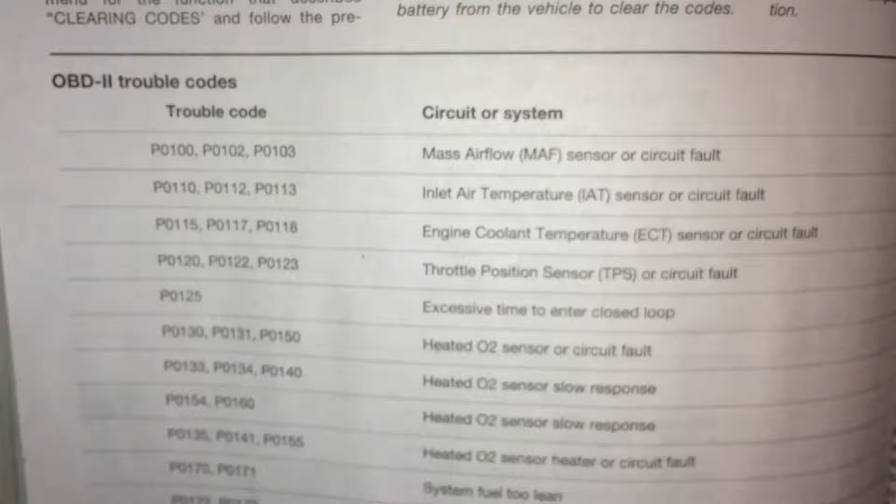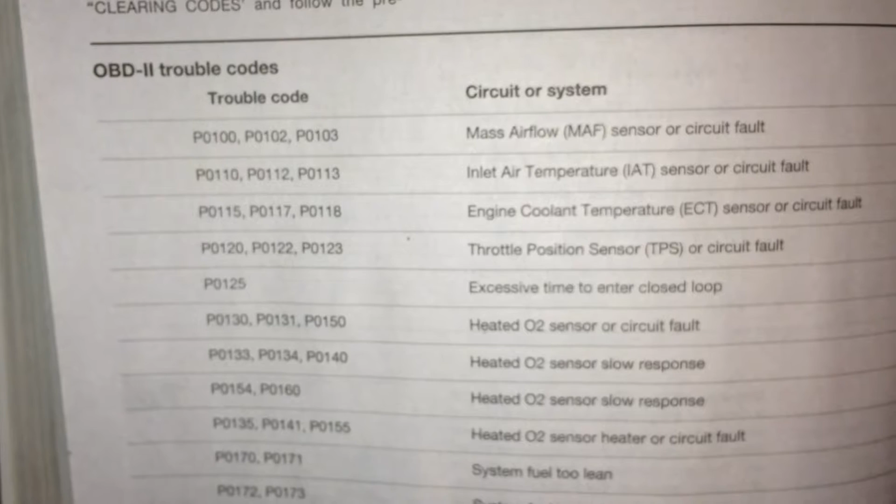Another episode of Mazda 626, Millenia, MX6, and this can possibly apply to many other vehicles. For the most part, this is actually obtained from the Mazda repair book. We're gonna go over a few of the check engine codes, and I'm gonna talk in detail about the most common ones, or at least the ones that I have seen with this particular vintage of vehicles.

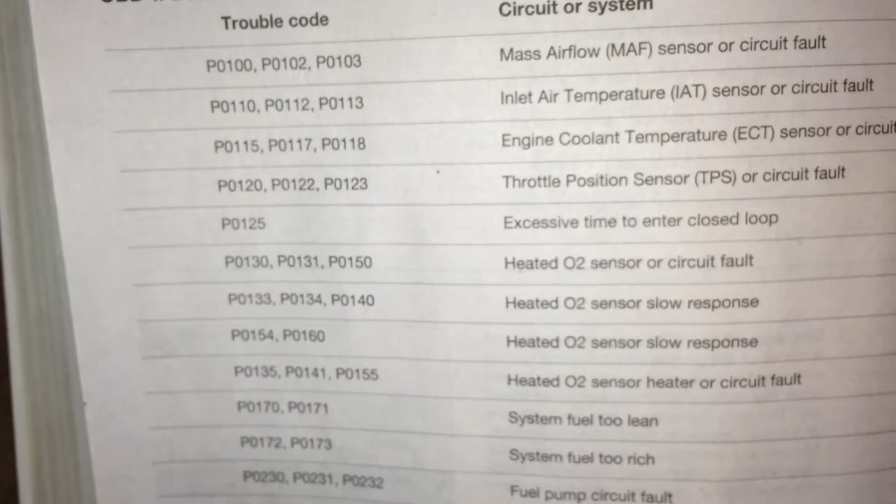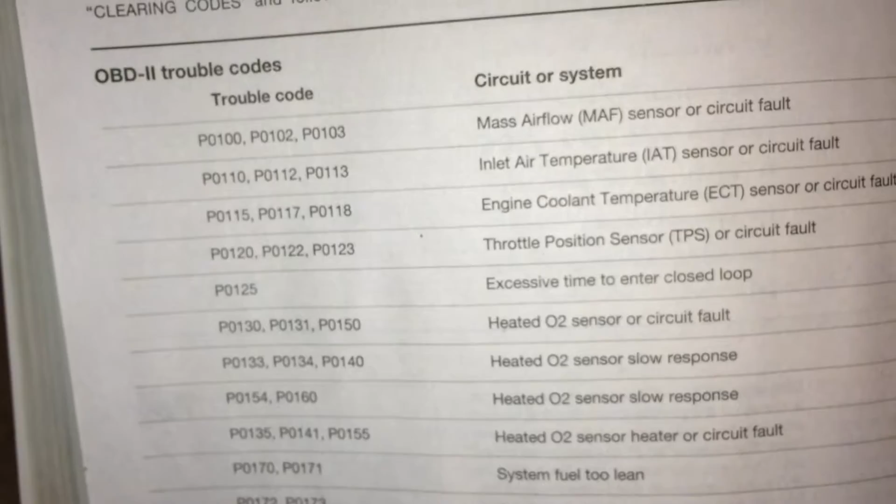Overall, I have owned, and I still do, two of these type of cars. A 2002 Mazda 626 EX, which basically means it's 6 cylinders, 2 banks, V6, and also the Mazda Millenia, which, to my knowledge, were all made with a V6 engine. Now, both of these cars' engines are identical, with a few minor changes. Can't really speak about the transmission though. They do look alike, but they behave a little different in both my cars, so I can't speak about the transmission being identical. But let's go over a few things in here.

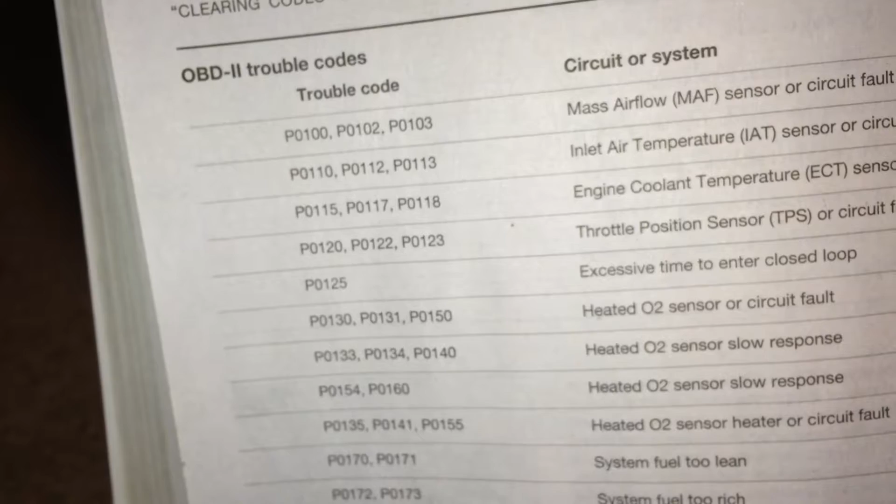And for those wondering if I'm gonna show how to test a few of these sensors, not in this video. Some of these sensors require a power probe, test light, and also a multimeter, both to the sensor and to the wiring. So we'll get to that at some other point down the road, hopefully.

But we're going to start with the first line, which is P0100, P0102, and P0103. Basically, it's pointing to the mass airflow sensor. It's very basic, to the point. It doesn't mean that the mass airflow sensor has failed. It means that you should focus your attention over there. And do not just throw a mass airflow sensor in there. Some of the sensors can bankrupt you. They are very pricey. With the mass airflow, right off the bat, I would look at the sensor.

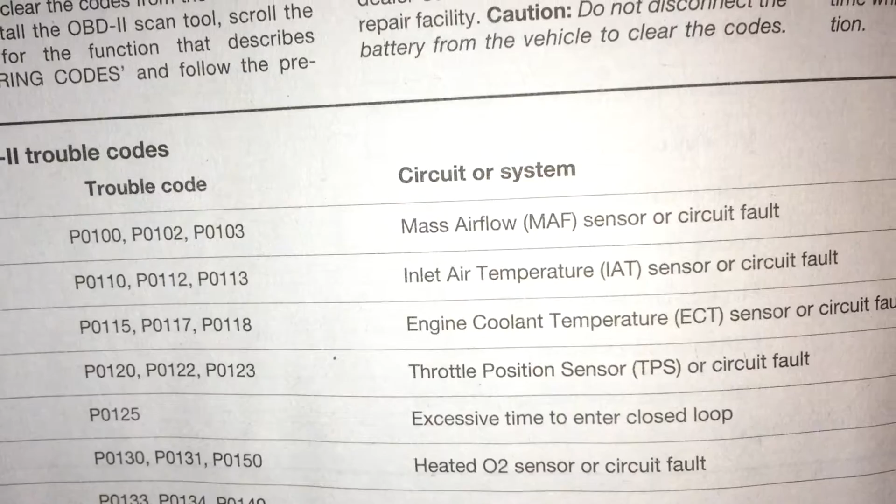Do not touch it. Do not clean it with the first thing you see. They make a specific fluid for mass airflow sensors. And I have gotten cars, not a Mazda though, where they say, well, I took it to the mechanic, he cleaned the mass airflow sensor, and when I check the code, it's pointing to the mass airflow sensor. I look at it, they cleaned it from one side and the other side is dirty. Don't ask me how this happened, but it's happened to me twice. Usually I do not like to take them out, but if I have to, I will.

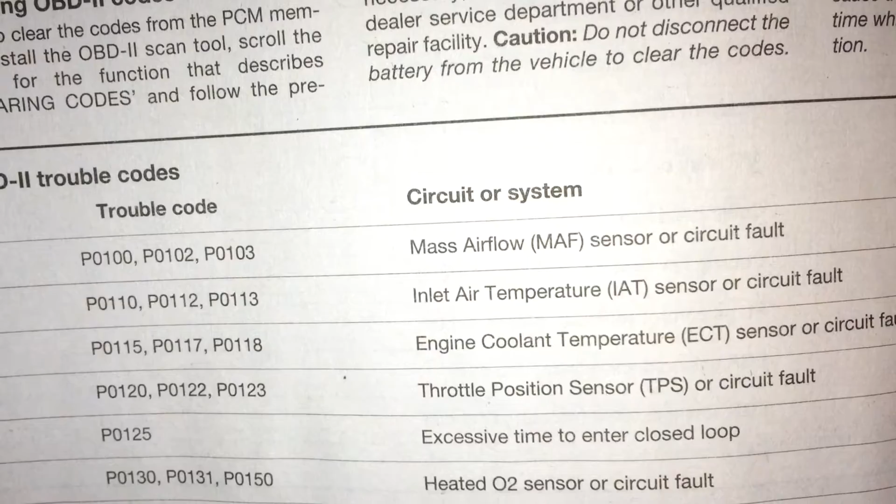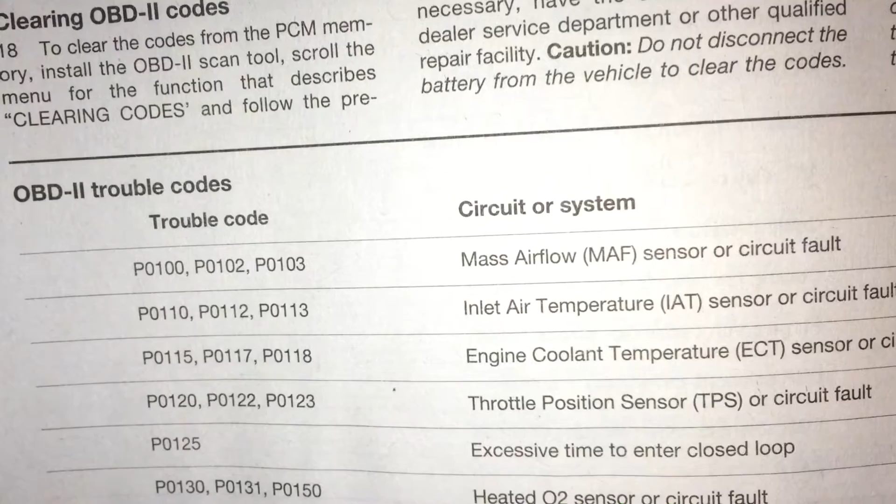Some of them actually live inside of a container or a hose or something like that. And you can take the hose off after you take it off the harness and look at it from both sides. That way I do not risk dropping it on the ground, on the small filaments, getting it dirty again. This sensor is very, very sensitive. So buy the special can for it. It's probably like $6-7. You might say you will never use it, but I'd rather pay $6-7 for a can of mass airflow cleaner than buy the sensor itself.

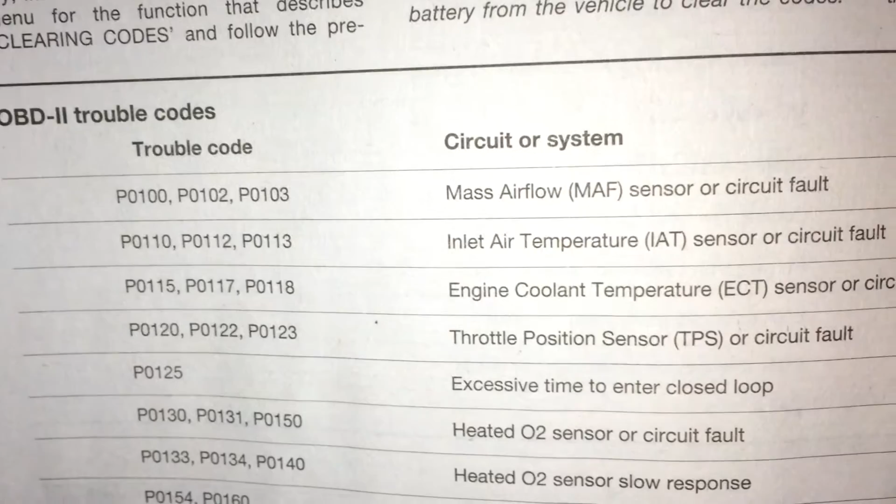Alright, so let's say that you cleaned it, you put it together, you cleared the code, and it comes back. What next? Well, I will also check the wiring, the harness. Make sure it's in good condition, nothing bent, nothing kinked. The sensor itself has a clip. Make sure it has not snapped off. It's made out of plastic. They usually break. So check on that. On the Mazda, if I'm not mistaken, the mass airflow in both my Mazdas has 5 wires. Hopefully down the road we can go over some of the wiring diagram or live footage of the wiring itself.

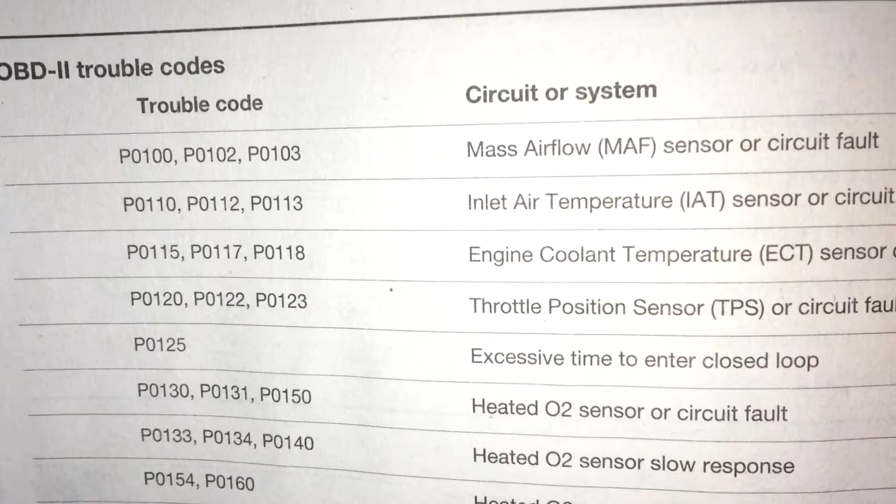And that's all there is to it. If I'm not mistaken, on the Millenia, the mass airflow sensor is with the airbox. On the 626, it's somewhere around that vicinity. I can't think of it now. I know that the airboxes are different, but usually it's around that vicinity. Usually it's way before the throttle body. So check between the throttle body and the airbox.

Alright, so inlet air temperature, IAT. I've seen this in many places. I've seen this on the intake manifold. I've seen it after the throttle body. I've seen it before the throttle body, after the mass airflow. Check them. When I can, I'll go down and check on live footage which sensor is what on the Mazdas.

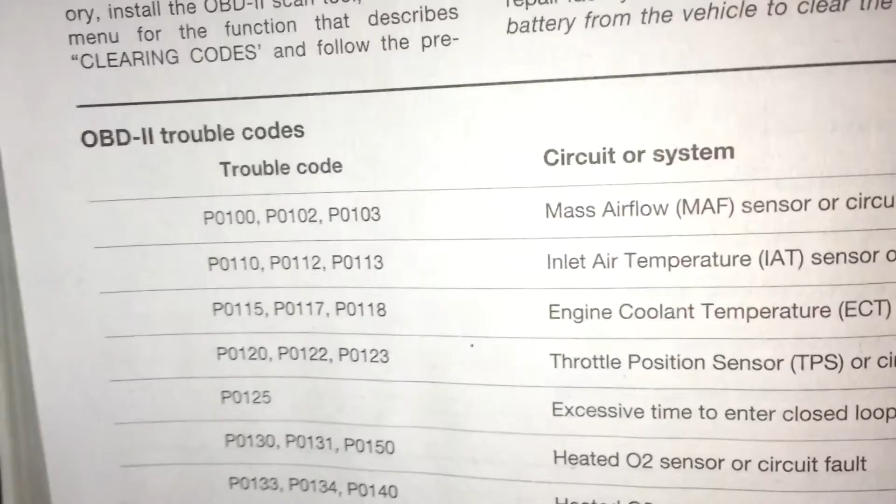So same thing again. If I'm not mistaken, the air inlet is either a 2-prong or a 3-prong. Positive and negative, and the 5-volt reference back to the computer. So first, check the wiring harness to make sure it is doing what it's supposed to be doing, feeding and bringing information back. Usually on the 3 prongs, from left to right, the left one and the outer one are positive and negative, and the middle one usually is the 5-volt reference going back to the computer with the information that the sensor itself obtained. Alright, moving on.

P0115, P0117, P0118. Engine coolant temperature sensor. Now, this is not to be mistaken with the thermostat. It may be related, but on the Mazdas, on the left-hand side of the engine, if you're looking straight at it, there is an engine coolant temperature sensor, and usually there are 2 prongs. If I'm not mistaken, that sensor creates a resistance, and given the amount of voltage, it will send feedback back to the computer. I could be wrong. It could be a 3-prong, but we'll get to that later on when we identify which sensor is what.

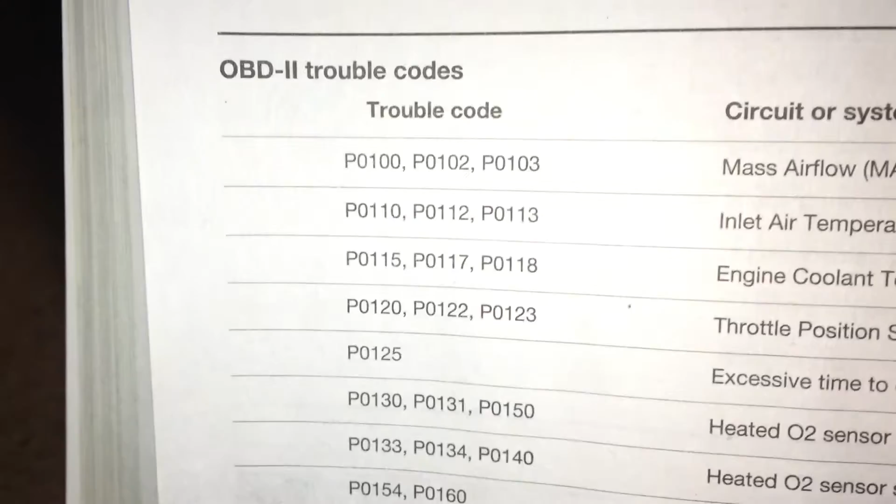Throttle position sensor, TPS. This actually is bolted to the throttle body.

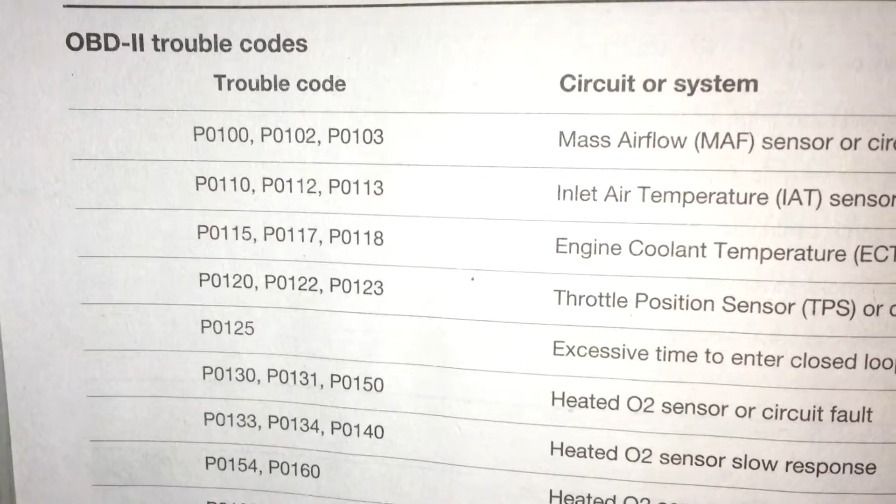And on this one, the throttle position sensor is actually bolted into the throttle body. On the Mazdas, there are fixed positions. You can't really adjust them or anything. It's just a straight 2-bolt sensor. On older cars, you could actually tilt them and adjust them that way. Not much to it.

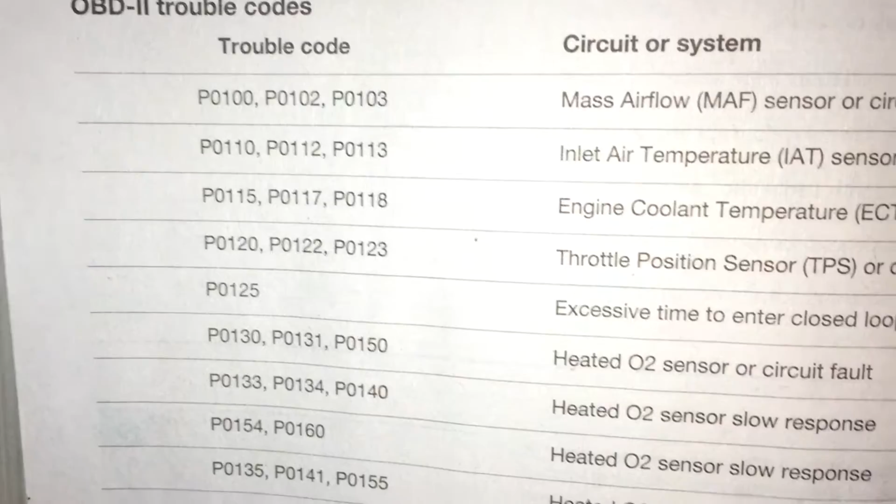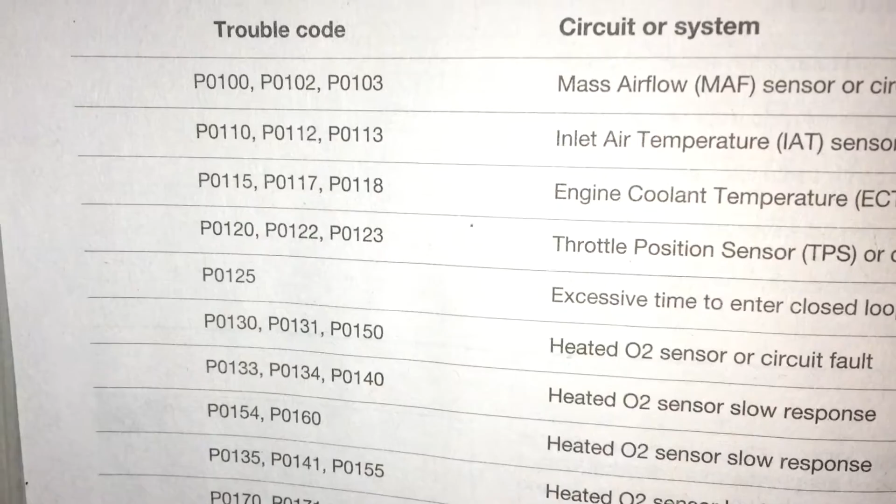Same thing. Check the wiring itself before you condemn the sensor. Sensors are not there to make your day bad. They're just telling you that something is wrong. Doesn't necessarily mean that the sensor is bad or the wiring is bad. It's probably telling you that something around that area is triggering that sensor to go off. Alright, P0125. Excessive time to enter closed loop. It sounds like an electrical problem to me. Never seen it, never dealt with it. So, moving on.

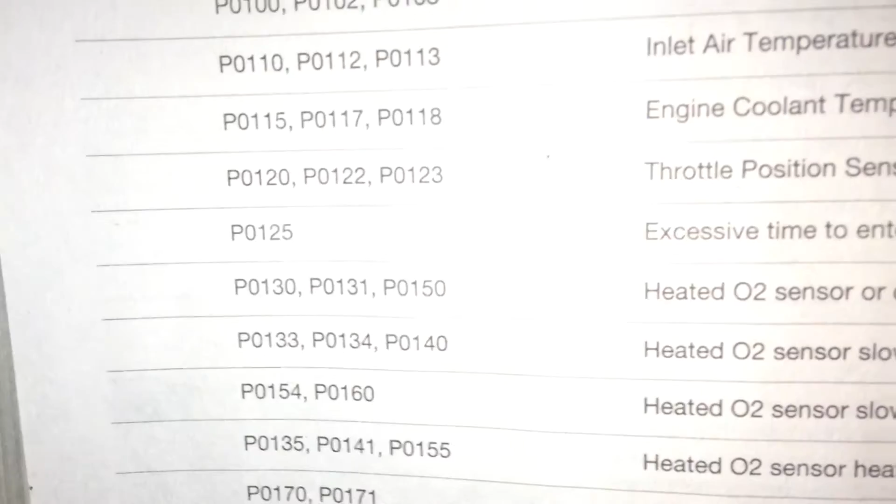So, you have a few oxygen sensor codes here. The first one, P0130, 131, and 150. The sensor or the circuit fault. Circuit fault is actually the wiring. The sensor itself can be bad. I have replaced quite a few of them. They're made out of ceramic. When you install them, make sure you do not contaminate the sensor itself. Put a little bit of anti-seize on the threads to make sure it doesn't seize in the exhaust pipe. It does get pretty hot, so it kind of welds in there a little bit. It seizes.

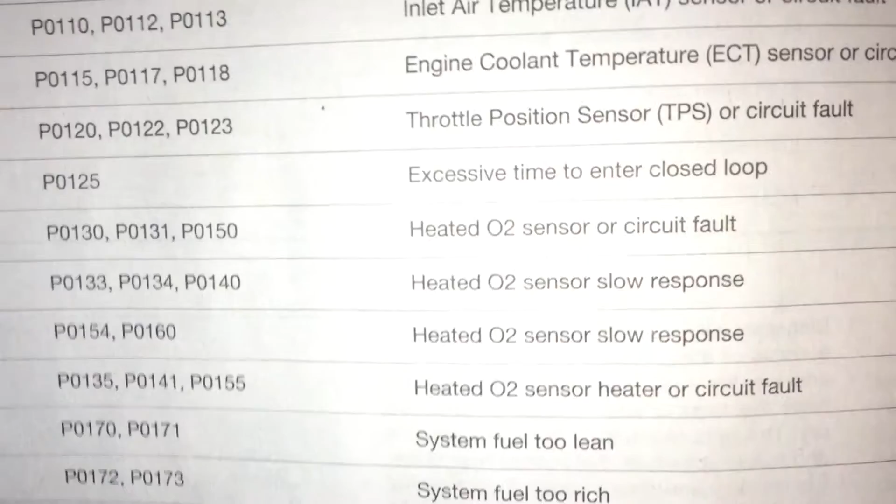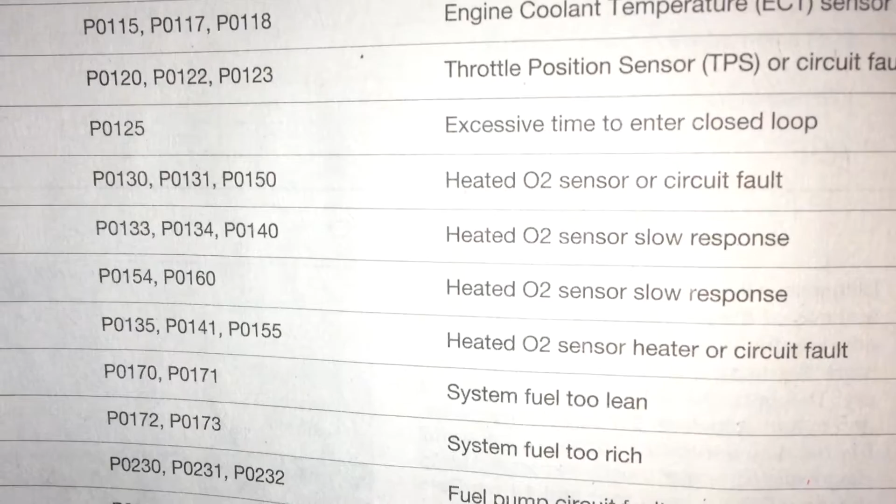P0133, P0134, P0140. The sensor again, but this time it's more specific. It's responding slow. For this type of slow response sensor, get a live scanner, plug it into the computer, and watch the O2 sensors to see how they behave. Make sure it's giving a voltage reference back to the computer. It's all over the place. Usually it should give back a reference of 1 volt. Certain vehicles may be different.

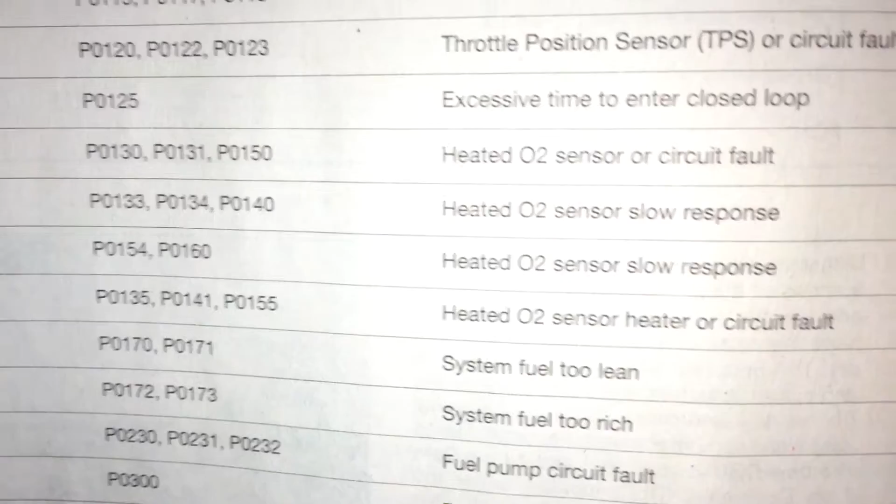P0154, P0160. Same thing again. If I'm not mistaken, that pertains to the rear bank, or the bank that's closest to the firewall on that car. If I'm not mistaken, that is also on the exhaust manifold before the cat.

P0135, P0141, P0155. Sensor heater or circuit fault. Pretty much looks at that area as well. Never dealt with them on the Mazdas.

Alright, moving on to P0170, P0171. System fuel running too lean. If the computer has to compensate more gasoline because air is at fault, or it's just not getting enough air, look into that.

Now, P0172 and P0173, system is running too rich. Also get a live scanner to look at what's going on. Usually the boot before the throttle body cracks, and this is both true on the Millenia and the 626 that I own. They crack, top, bottom, left and right, you name it, or it's not properly set. That can set off that code, or those few codes.

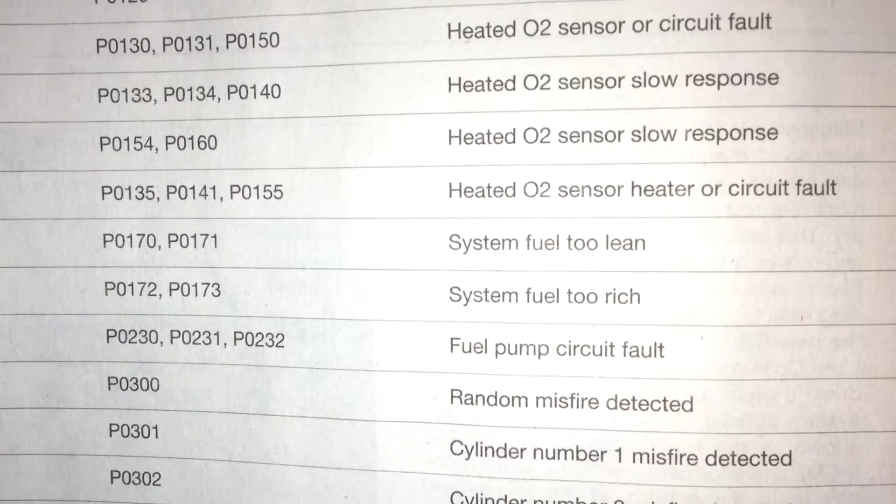One time somebody brought me a car, 626, and the mass airflow sensor was disconnected. So the computer didn't know how much air it was getting. So it was actually giving me both banks running poor, running too lean. But again, it had no knowledge how much air was going into the system.

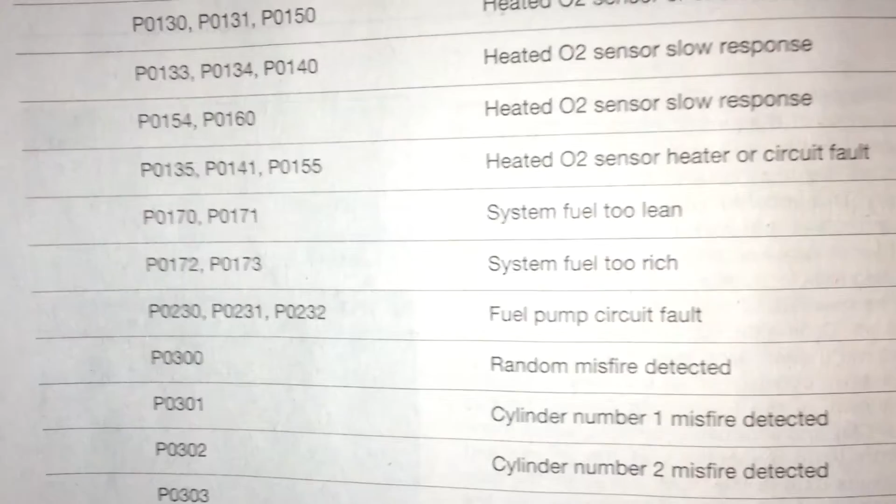So moving on. And I've seen a lot of those codes before I move on. The P0170, the 171, 172, 173. Too many of them out there, and I fixed 60% of them by looking at cracked boots, hoses, and one time at a PCV hose that was cracked, which was actually making the car run very, very poor.

Fuel pump circuit fault. That's P0230, 231, 232. Check out the wiring. Not really. I never had an issue with fuel pumps with the Mazdas. Only one time, but it was the fact that the customer liked to run the car on empty, and the fuel pump, no matter what car you have, self-lubricates itself with the presence of gasoline.

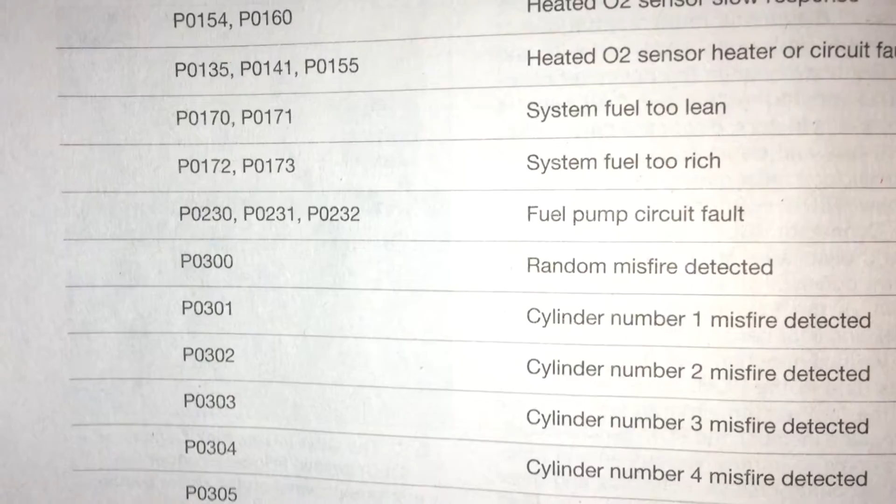So if you are running the car on empty too many times, you're going to see this code soon. You're going to blow that pump, you're going to run it dry, and it's going to just stop working. On these cars, the fuel pump is inside of the tank itself. It is a pain in the you-know-what to drop down. This can be avoided. That's just it. And also try not to put cheap gas in it, because dirt and debris can actually clog it up.

Misfires. So P0301. So look at the last digit. It will tell you which cylinder is at fault. 1 through 6, 1 through 8, 1 through 12. It depends on the vehicle. But that array of the 300s and on is actually reserved for the cylinder position.

What can cause misfires? A lot. Typical is, of course, a bad spark plug. That's one. You can actually have a misfire by having a broken ignition wire to it. Second, I've actually seen broken seal gaskets or any type of gasket in the intake where the injector is, and it's just not running right. Air is leaking in there. So it can misfire. It also can create a vacuum leak.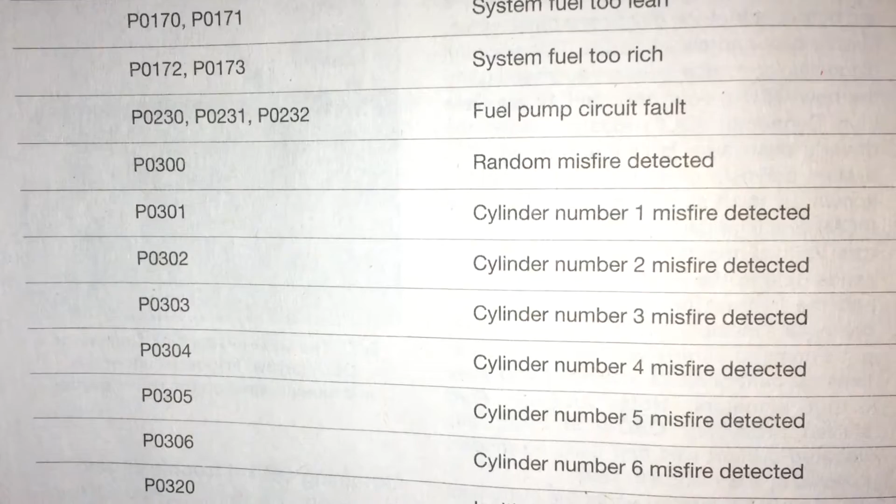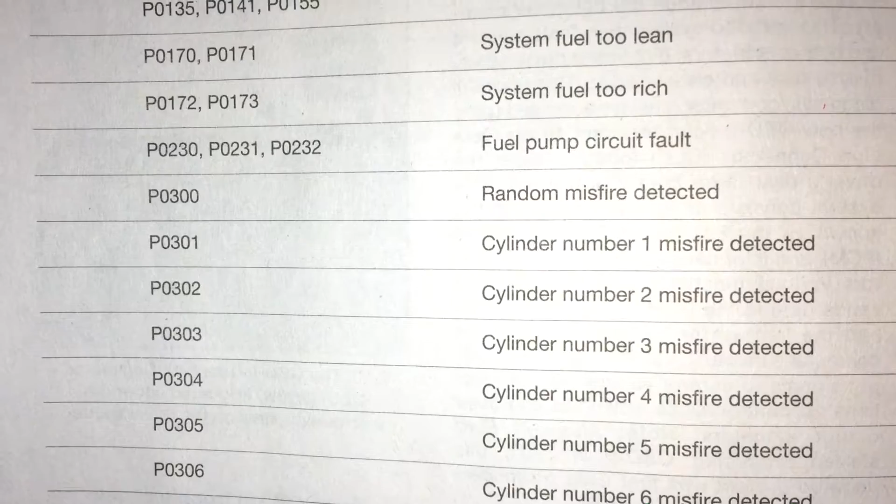Possibly a weak or bad injector. I don't really have issues with injectors. However, if you have an issue, inspect it, clean it, and also if you take the injector out of its fuel rail, look at the O-ring that lives in it. And that's true for all 6 cylinders.

So, ignition input circuit fault. P0320. Now, never dealt with those. I've seen a few cases where it's the ignition switch itself, where you put the key inside of the car. But more often than not, check the ignition, the coil, everything. Never seen this before in my cars. I've seen it in other tutorials. Check those out. Maybe that can help you out. So that's it with that one.

So I'm gonna pause it here. I'm gonna take a small break. I'm gonna end this part 1 of check engine codes for the Mazdas.